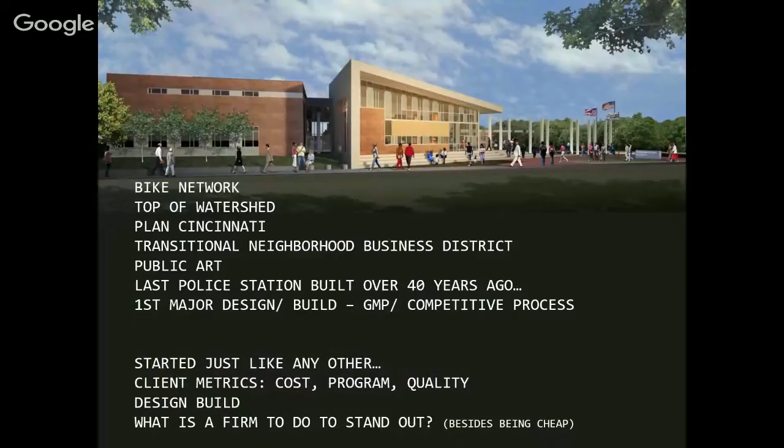We just wrapped up construction on this project, so we're starting now to gather the data to prove net zero. But the whole story of the project really starts with kind of a traditional model from the city of Cincinnati. They had their own cost metrics, their own program metrics, their own quality expectations. This was a design build project, so they were seeking a fixed price. Design teams paired up with contractors, and this was a competitively bid project.

As part of this RFP, this project is located near the start of a bike network. It's at the very top of a watershed that's seen a lot of degradation over a series of years that the city's working on recovering or repairing. There's a lot of interest in how this project interacted with larger urban planning schemes. This is at the start of an intended high density business district.

They wanted to incorporate a lot of public art, and the last time that they built a new police station was about 40 years ago. So they wanted to really transform the paradigm of what a police headquarters really is and what it means to the community. And so the RFP asked for all of these things and said, oh, and LEED Silver,

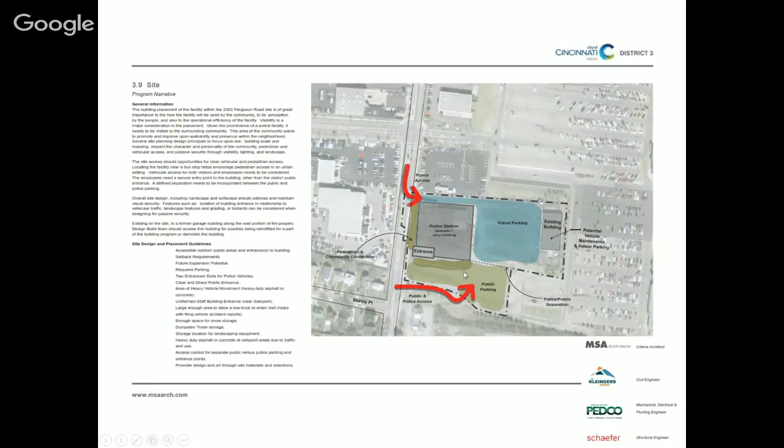we've kind of talked through this, in terms of our approach. In our response, we created essentially our base bid, which responded to all of the criteria of the RFP, and then we put together these betterments. And one of the things that I was really excited about with betterments, which actually didn't end up playing out, was the idea of using PACE financing to try to create a scheme that actually would allow the higher performing betterments to actually be a smaller upfront dollar value for the city, right?

Because you could lump a bunch of energy efficiency improvements into the PACE financing and finance that over 30 years, whatever it is. And so your upfront cash bill would actually be smaller to achieve a net zero project. A net zero LEED Platinum project would cost less than our base bid, which didn't quite work out that way. We got into how the city can access the PACE financing. Right. And so, PACE is based on property value and property tax, and since it's a public entity, it was...

But we had a lot of fun. Like, we were getting kind of giddy about, oh man, this could be awesome. Yeah, that was the proposal: that our base bid can be lower if you access PACE financing, and you can on top of it. Well, but it's whatever the financing is. The idea is structuring the higher margin improvements, mixing that with the lower margin improvements to stretch it all out.

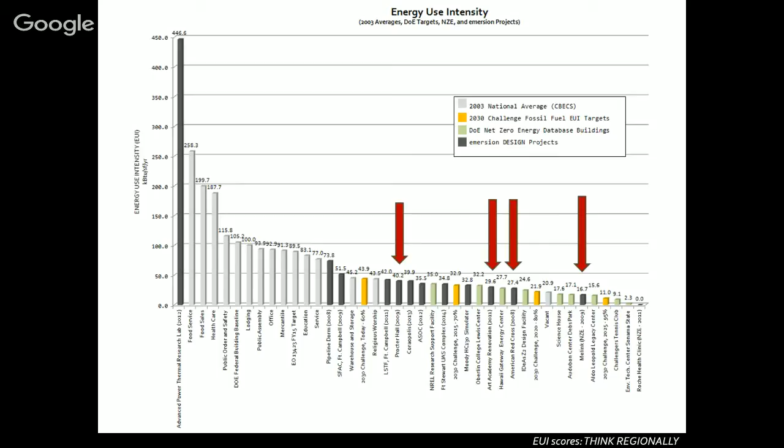It's helpful. So just a couple of other projects to benchmark against as we go through. So this was Proctor Hall for the University of Cincinnati. We renovated the envelope. We actually didn't even touch the mechanical systems and brought them down by about 15% in terms of energy use. This is, that's right. And then we've got the renovation for the Art Academy at 29. This was a brand new building that was built for the Red Cross at 27.

And then this is a project that a colleague of ours, this project was built before our involvement, and we got involved when he decided that he wanted to take his existing building and make it net zero. And so we came in to help him do some envelope modifications. So what's really cool about this is that it's a net zero energy renovation, office and manufacturing, and it's at 16.7. And you pointed out the average vacant building was at 20.9.

Yeah. So they're manufacturing. What's that? How do you get that low in the EUI? He distributes a lot of sweaters to staff. Literally. Personal thermal devices. You talk about occupant engagement. Yeah. It's their culture. This is the culture of this company. I mean, from the top down, it's part of hiring. It is baked into this company.

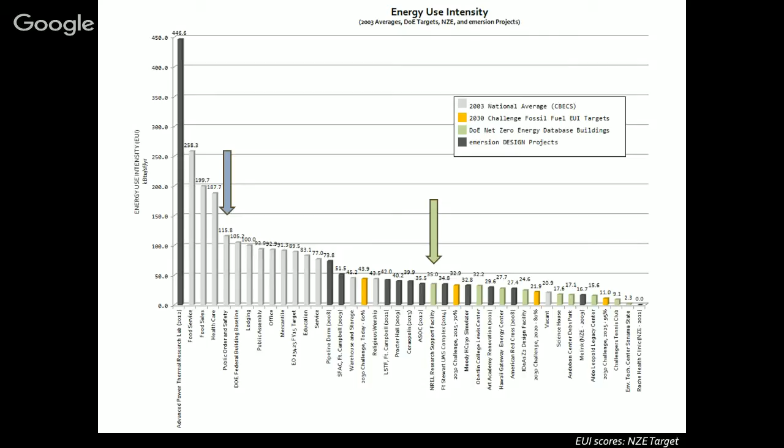All right. So in terms of trying to establish what a realistic target is for this police headquarters. This arrow represents the national average for police headquarters. This is the project that we use as the minimum benchmark in terms of, if we're going to talk about net zero, this is kind of the minimum. So this is the DOE NREL Golden, Colorado facility. This is 220,000 square feet of office and lab.

And there's some differences in terms of using this as a benchmark, but 35 is what we said is like, okay, if we're talking about EUI, or if we're talking about net zero or ultra low energy, this is where we're shooting. So you can see some of the differences here, right? This is 220,000 square feet compared to 40. So in terms of scale, it's a little bit different. There weren't as many security issues with this facility, so we didn't have bullet resistant glazing in there or whatever.

Timing wise, this is 5 years ago, so looking at escalation, they do not operate 24/7, 365 days. And one of the big pushes within the District 3 project was that typically, when you start to look at plug loads, it's a really easy switch to go from desktops to laptops, right? Because they use much less energy.

And in this project, there was a blanket no laptops, right? Everybody's on desktops. So we had that to overcome as well, whereas the DOE NREL project has everybody on laptops. The sort of mandate was the police operate a certain way, we were not to affect how they function, because I don't think anybody would want to jeopardize the way that they function.

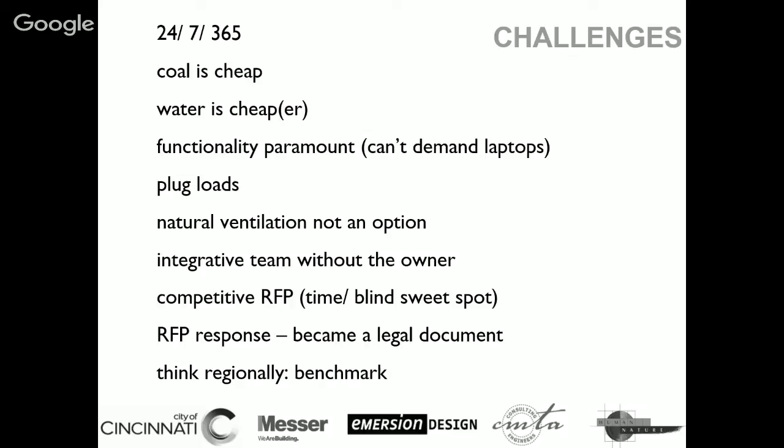So I've actually read about this building a bunch, and something that surprised me in the case study was that you talk about EUI and the plug loads. You think HVAC, you think the big pieces, but they have so many desks there that their voice over IP phones had a 15-watt phone as the standard, and they were able to get a 5-watt or 3-watt. Wow.

And the difference in changing the phone over, you think it's a couple watts, what's the big deal, right? It was the equivalent of like an extra $200,000 of solar that would have to be installed. So instead of just putting the solar on to accommodate the load, you get so intense to dive deep into the load and think, okay, there's 220,000 square feet of offices here, hundreds of people, maybe these 5-watt differences matter. Yeah. It totally does. It's amazing.

Yeah. The police wanted each individual locker to have a fan within it, because they wear bulletproof vests, it gets kind of sweaty, they put it in the locker, and it reeks. So they want individual fans. And so we looked at it, and similar thing. Each little fan wasn't much, but when you add them all together, it's like, oh my gosh, we blew it. Right.

And so we were able to work through a system where there are vents down low, vents up high, and we just pull a little bit extra than we normally would out of the whole room. So that pulls it out, instead of having individual fans. It's the same thing. It's looking at every little device. How can we squeeze? How can we think about things differently?

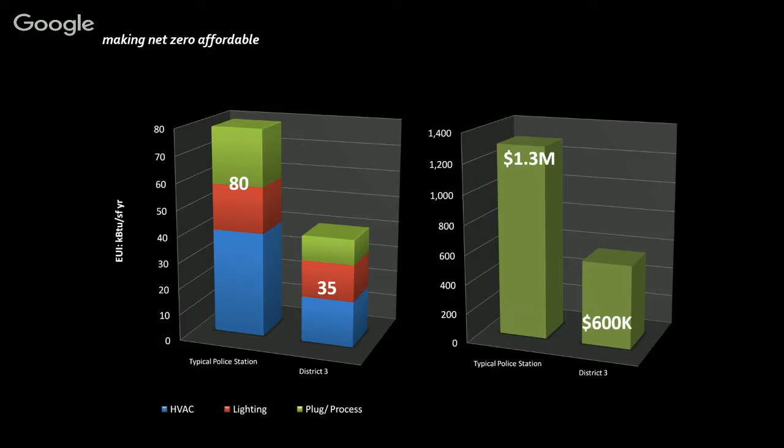So in terms of our process, we need to switch here. So we do operate integratively, and again, it was a little bit difficult because we didn't have direct access to the client at all times like we normally do. We had a month to work through this. We did have some access to the end user and to the client, but that time was somewhat limited.

And so behind the scenes, we knew that there was a lot at stake for the city for this project. There were going to be a lot of eyes and ears on this thing, so it really needed to hit a home run. So part of what we did during the design process was start looking at how we were designing and doing design energy models, not the engineering energy models on the back end, but looking at massing, looking at orientation, window to wall ratio, that sort of thing to lower that consumption.

Obviously we had to hit the RFP goals. And as Sean mentioned, we wanted to kind of bump those up a little bit. Budget was always a critical thing, and always is on any project. This one was a competition based on dollars, so we really had to nail that one down too. And then the community connectivity.

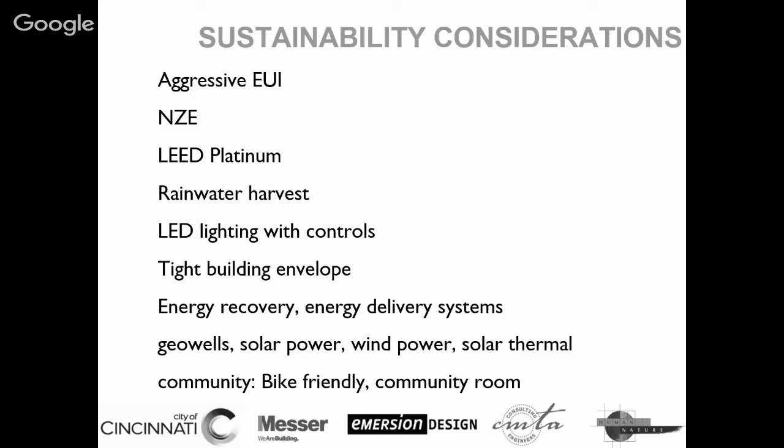One of the really interesting problems to solve for this project is that the police department wanted everything on one floor. Well, that didn't really fit with the Cincinnati plan of trying to enhance the neighborhood business district and trying to get multiple stories. So our competitors saw that as two things that could not be resolved. We thought, well, maybe there's a way to go here. And so we had more conversations with the police department, with the city, and we understood that the police department wanted all of their functions to be on one floor.

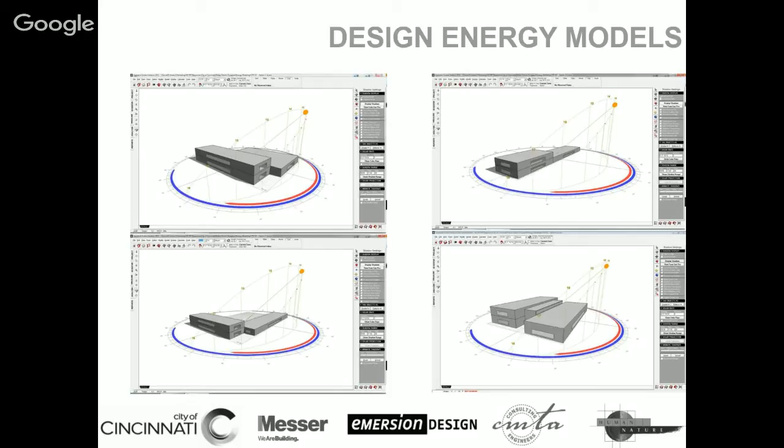Hopefully she doesn't tell everybody, but... Right, and hopefully people in Cincinnati don't hear this broadcast. Right.

So obviously the thermal envelope was a big part of our strategy. So this was a precast panel, 4 inches of concrete, 4 inches of expanded polystyrene, and then the finish was a combination of concrete and brick inlay. So that was one panel. So it arrived on the site. It went up very quickly. I think that it was something like 16 days to clad the building.

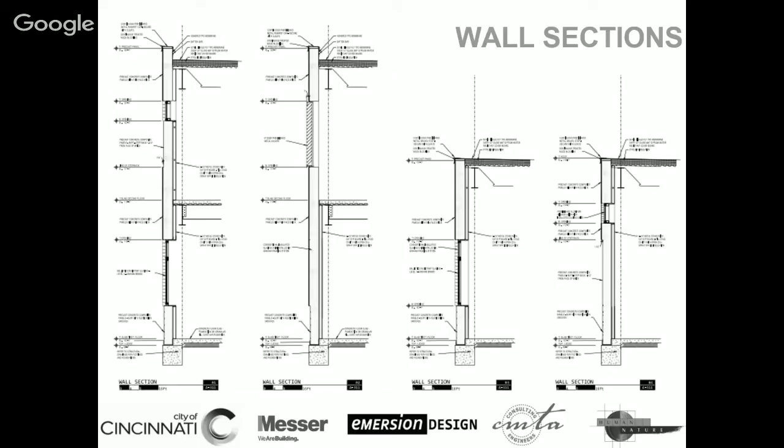Then we had a little gap and then put 2.5-inch metal studs in front. So that gap was important so there wasn't a thermal bridge, and spray foamed behind it and through that cavity. So then we have a continuous air barrier, really sound, really tight thermal envelope. Of course, all these other building envelope considerations, we scrutinized everything. And what was really interesting for us was the requirement for bullet resistance. So obviously the concrete panel satisfied that. The windows needed to be bullet resistant as well. So we had the bullet resistant glazing, but then we also had an offset for an insulated unit.

And so when I was there on the site in February, there was snowfall that kind of landed on the window, and that never melted. It's like, that's pretty cool. Not just bulletproof, it's heat. Yeah, right, it's pretty cool. What was the U value on bulletproof glazing? I figured somebody's going to ask that. I don't have that committed to memory. I'm sorry, but I need to remember that.

We were touring a school in Mississippi at Greenville. They did these tours, and it's called FEMA 361, the standard for withstanding disasters. And the glass had to withstand an oil barrel full of concrete flying at 100 miles per hour. All the windows? Yeah, glass. I was like, wow.

And I think the U value of the solid material would probably be negligible. It's the air gap where you have insulation. So if it's a single pane of glass and then you have your insulated unit, you couple it with the whole system. Right. The glass itself, okay, thick glass doesn't really matter. Well, I wonder if, instead of needing to have one really thick piece, there was some system in place where you could have multiple panes, triple, quadruple, what it might have been to get both the thermal insulation and the bulletproof.

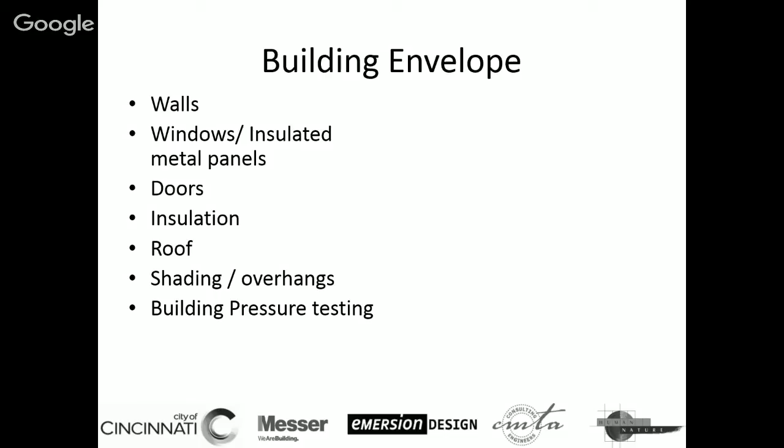And then lastly on this list is the building pressure testing, and we'll get on that a little bit later. But we wanted to have a blower door test just to make sure that everything that we thought was going to be there was there and built the proper way.

And you can see the streets on the left, and we pushed the building up to the street, more walkable environment. We have a little plaza out in front, and then put a lot of the parking to the rear and to the side. The existing... You're asking all these really difficult questions. I used to know, but I don't.

Yeah, the issue with the police station is that they have their cruisers and they have their personal vehicles. If this were just an office building, we could get by with less. But essentially, not everybody, but most people have two cars. Yeah, that was the kicker. It's like this amazing project that still has a giant sea of parking.

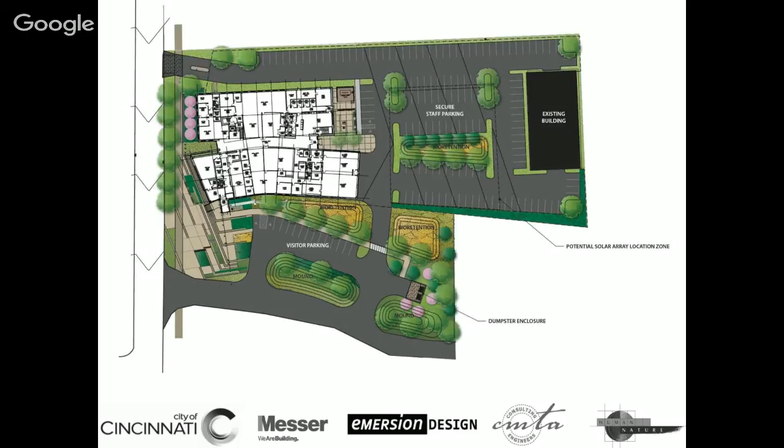And if you think about being a mechanic, a lot of times you're on the ground anyway. And so it heats the body, so it does a really nice job mitigating it.

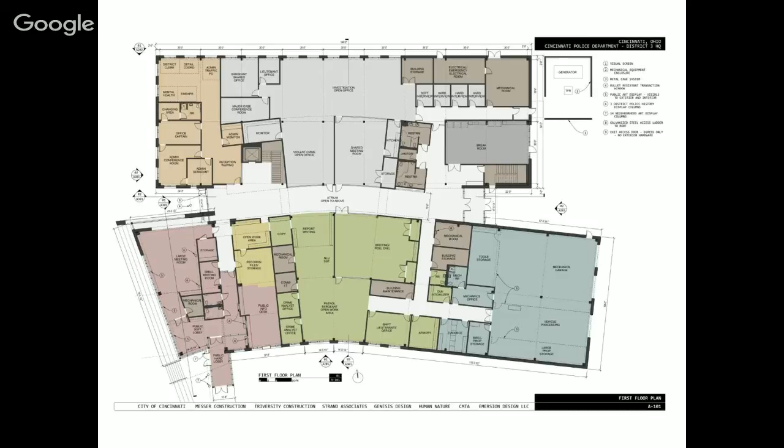And then the red area, that's more of the public zone. So anything that is not red is within that bullet resistant secured area. So even going in, you can get into the first vestibule, then you have to be buzzed in to get to the public sector, then you have to be buzzed in or escorted into the rest of the building. So there's a series of security protocols.

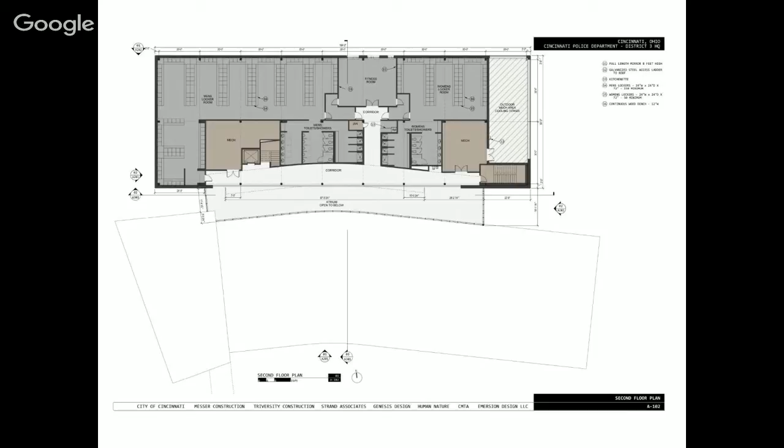And then, as I mentioned, we moved the locker rooms and the workout center and some of the mechanical upstairs. And what this allowed us to do was basically help with the thermal properties of the offices below, because there's not a roof there. There's an actual tempered building, and we could let the locker rooms float a little bit in terms of temperature. So you don't have to have those tempered the way that you have to have the offices down below.

So then this is the final elevations that we had, and that front piece there with the angled roof, that's the community center. You can see a lot of glass there. We were able to do that because it didn't have the bullet resistant capabilities to it. Otherwise, that would have been pretty pricey. So it's a single floor, but it's a taller, larger volume, so that it could be close to the second floor that you see next to it. Those thin windows up on top are the locker room area. And then down below is the command office space.

How far out is that overhang? Boy, what's with all these questions? I don't know. I'd say it's maybe 8 feet, something like that.

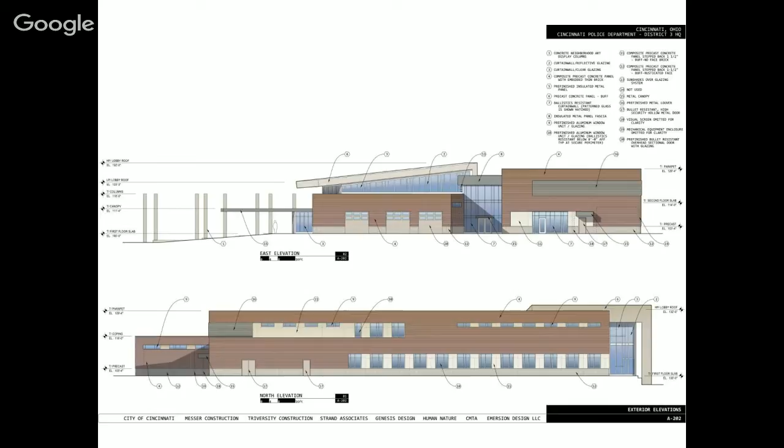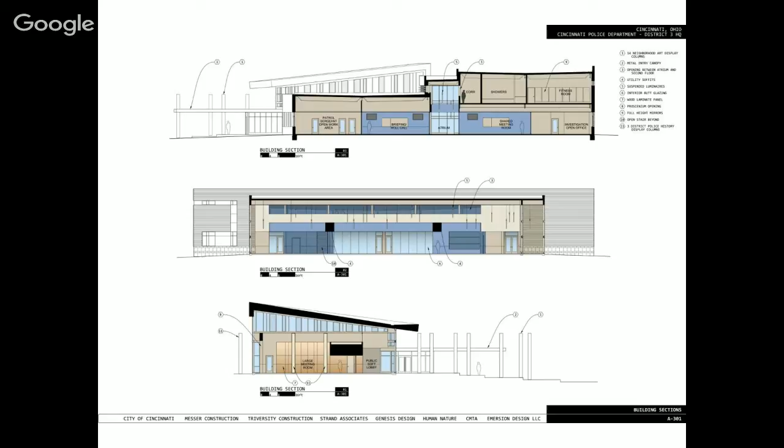You can see in the bottom elevation, there's a long, thin clerestory window that rises above that first floor bar. We have an atrium down the middle. It's more of a story and a half, and then the second floor. And so you can kind of see that here in the top section. Just to get some daylight into this building, there's a central spine, that atrium, that helps with communication between the departments, but also creates this more casual circulation zone through it. And then the bottom is that community space. Again, just bring a lot of light into that so we can lower the electric consumption.

Can you use that central spine for any kind of natural ventilation? We do not have natural ventilation. So trying to have operable windows within the secure area, we weren't able to figure that one out. And then also, when we're looking at trying to create a really tight envelope, that was the strategy that we used as opposed to the natural ventilation piece.

And so then these were the renderings that we submitted, and it pretty much looks like this today. So we're also looking at the different technology pieces, making sure we had the design chops there. I mentioned the radiant heat flooring. That's what this shows with the garage. We had dedicated outdoor air systems, geo-exchange heat pumps, zoning, and so the building is zoned in such a way that the water source heat pumps didn't have to travel far to temper the spaces.

And then one of the really cool features is that they're really easy to maintain. So they're in a closet, they're not up in the ceiling. Not only are they in a closet, but they're elevated, so you don't have to bend down to work on them. You can be right there and work on them. And so the more that you can make it easier on the maintenance crew, the more they're going to be maintained, right?

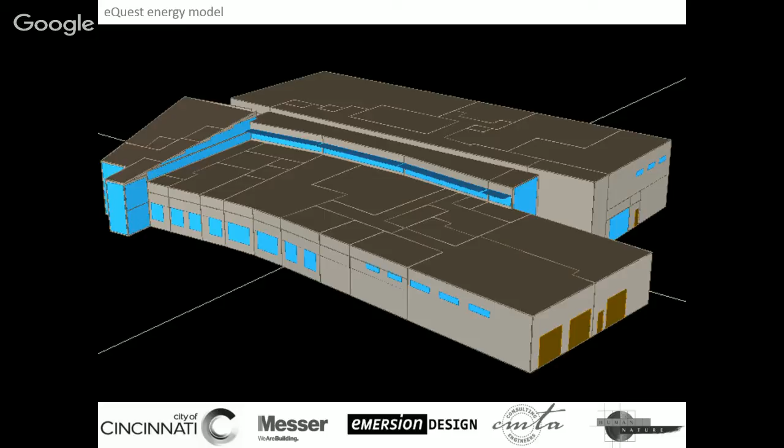This was the eQuest model that we did after design, just to say, okay, are we on track with our EUI? And we had multiple energy charrettes, some with just the design team and some with the city and end user. So as I mentioned, we had at times 5 or 6 police officers in the room, talking about these kind of scenarios, which is really great because you don't get that opportunity all the time.

And so early on, some of our design thoughts were just with the team in terms of how we lay out the spaces to make them more energy efficient. This being a 24/7, it wasn't quite as much of a challenge as it might be in other situations, because it is fully operational.

And then working through that eQuest model, we wanted to benchmark ourselves to say, where do we stand against CBECS? Where do we stand against current codes, more recent buildings? So the CBECS broken out into the different categories comes to a total of almost 116. The code compliant modern day police stations come around 80, and our energy design was coming in at 35.

So we've identified a liaison with the city that's going to start giving us some energy performance criteria. So the building is metered in different ways, and then we can begin to track, is the building performing the way that we thought it would? So we don't end up a year from now saying, oh, we're not there. Within 3 months, hopefully we can see any adjustments that need to be made.

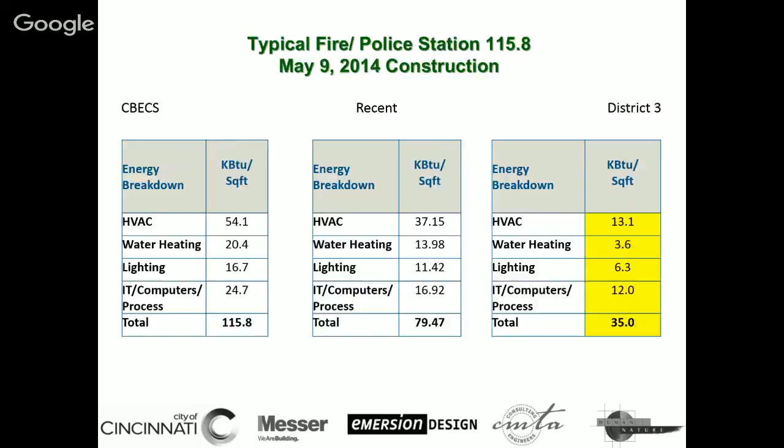Yeah, it's getting close. So obviously cost is an issue. This was a competitively bid project. So the base building, this is what the city had as their requirements without the site work. So this is just the building, came in at 9.8 million. And when you look at the RSMeans cost guide for a police station in our area, that was 10.4 million. So we felt pretty comfortable going into the competition that we were providing value to the client.

With the net zero energy high performance features, that came in at 1.9. And so as Sean mentioned, one of the strategies that we tried to employ was to look at PACE financing to cover not just the 1.9, but also some of the 9.8, so that through PACE financing, even our net zero energy design would be less than our base bid price.

Then when you break it down into cost per square foot, our design for the base bid was 251, with the high performance that came in at 300 per square foot, and the means base code compliant was at 268. So again, we felt pretty good with our base, and if they wanted to go net zero energy, we still felt like that was reasonable in terms of the ask.

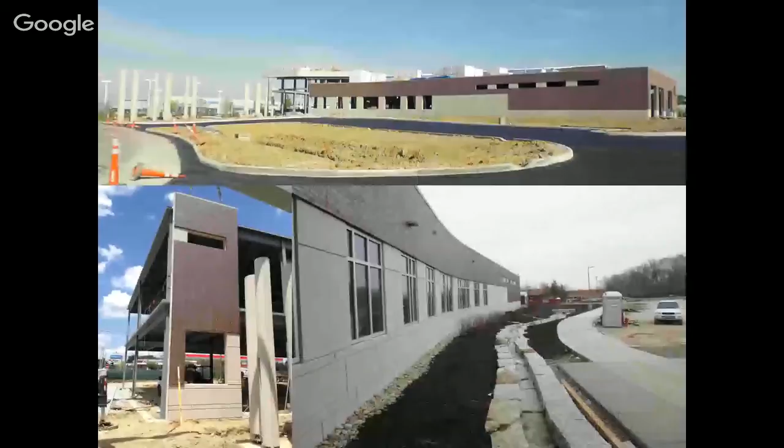And we did a return on investment, and the solar panels are paid off within the 8-year time frame. So we felt anything under 10 is fair game, especially when you can make the case that after 8 years, now you have free energy. That's got to feel pretty good to taxpayers, right?

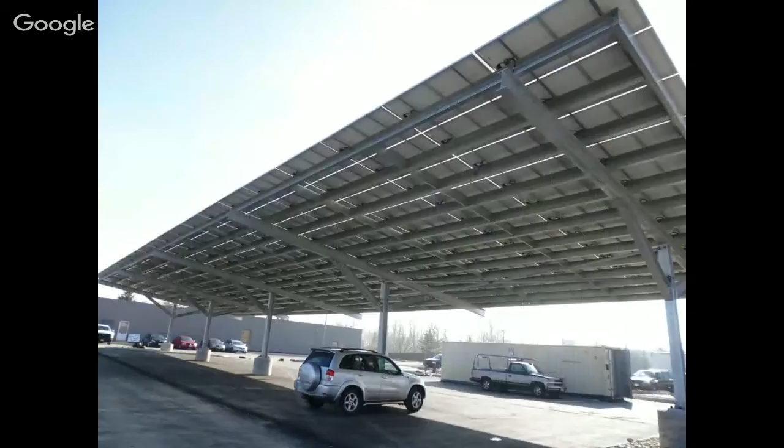The city wanted to pull some of those panels off the roof for a canopy so that the citizens could actually see the solar panels. Otherwise, it's up on the roof and you can't see them. So that was more of a public display. Obviously, it helps some of the officers too because they get to park under the shade. It's just kind of a badge of honor to be able to put everything up on the roof, and then they kind of took that away from us. So you could fit that entire canopy up on the roof.

This is the final product. Again, that larger glassy piece is the community center. We do have some of these columns out in front. Each neighborhood, there are 14, gets a column, but they also act as a security device. So somebody trying to drive up and attack the building will hit those columns prior to that.

You can see some of the landscape, which are the bioretention cells, and then the garage piece. Part of this was also CPTED, so crime prevention through environmental design. So recognizing that there are visual cues that the architecture and landscape can provide to minimize crime. So we used a lot of those techniques, having a lot of glass, so it's really visual.

People outside feel like they can be watched. Having low landscape, so nobody can kind of hide in there or plant bombs or anything. Have clear division between what's public and what's private, so that it's not just a chain link fence. It's a secured structure. So even visually, the police won't feel like they're being spied upon. And then creating a little secure plaza for the police.

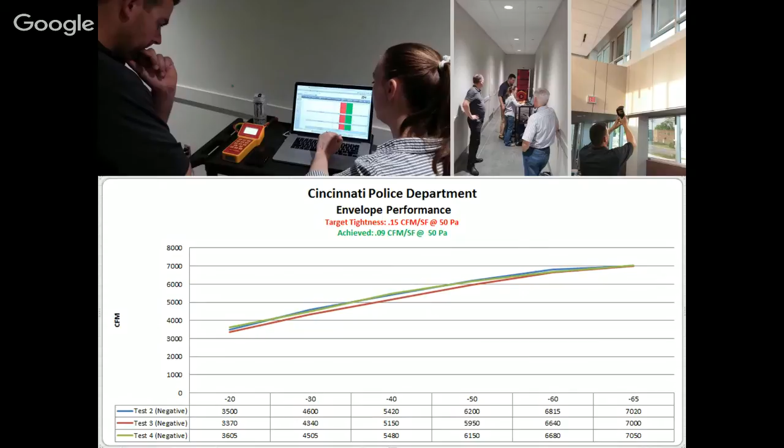And then some of the other cool stories: the GC would obviously send any of the invoices to his controller. The controller called back in February and said, I don't think I have all of your invoices. I said, well, what do you think's missing? And they said the temporary heat. I said, no, I sent that out to you. Do you have number one, this number, this number? Yep. Okay, well, you got it all. He says, well, we're not using what we thought we were going to use. They saved $4,000 a week on temporary heating because the building was so sound.

That's just dollars that went into the contractor's pocket. Now that we know, we can say, okay, well, maybe we can back some of that out and lower the price. It was like those torpedoes. There's torpedo heaters that they have. So during construction, they didn't have to use them much. They used them, they brought it up to about 55 degrees, but then it shuts off because it's not needed.

So there's another story where he woke up in the morning and looked at his phone, and there was a text tied to the system that said the power to the building was shut off at 11 o'clock the night before. So he's thinking, great, I'm going to come in, it's going to be freezing. This was in February for us. It was below freezing, and they had just mudded the day before. So he's thinking, okay, all that's cracked. He comes in and it's 50 degrees.

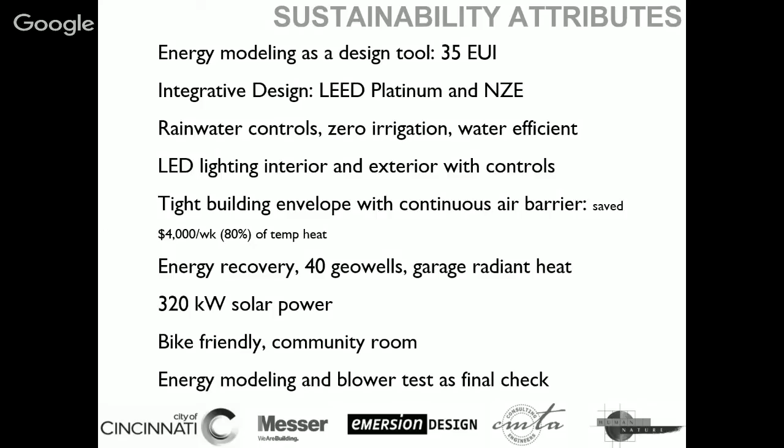You know, so focus on the envelope first, and then you can size your equipment properly. And a lot of times you can downsize and put that money towards the envelope. In your building, what are, say, the three big things that help you achieve net zero? Is it the envelope and the renewable energy?

Well, certainly we needed the renewable energy to get to net zero, but the way that made that affordable was the thermal envelope was probably the big one. Being able to look at plug loads, having a client that allowed us to mess with that stuff when normally architects don't get the chance to do that. And then also the client being open to us making different kinds of strategies and suggestions. We do have 40 geo wells, so that helps a lot. And then, you know, just having a client willing to allow us to ask a lot of questions.

Did the daylighting help a lot, or was that just extra? The challenge with this project is that it's a police station that's 24/7. So daylighting does help during the day. We do have sensors, but at night it's all on anyway. We did do some zoning. I mean, zoning, I think, would be the other key strategy that played into it.

So looking at taking program functions that are infrequently used or not regularly used and isolating those and even creating those as buffer zones for the spaces that are occupied 24/7. So the community rooms serve as a buffer, the locker rooms serve as a buffer, the garages serve as a buffer. So a lot of the occupied spaces that are 24/7 that need constant cooling, constant heating, have more spaces around them that serve as a buffer. Did they allow you to put the occupancy sensors in all those rooms that you're talking about?